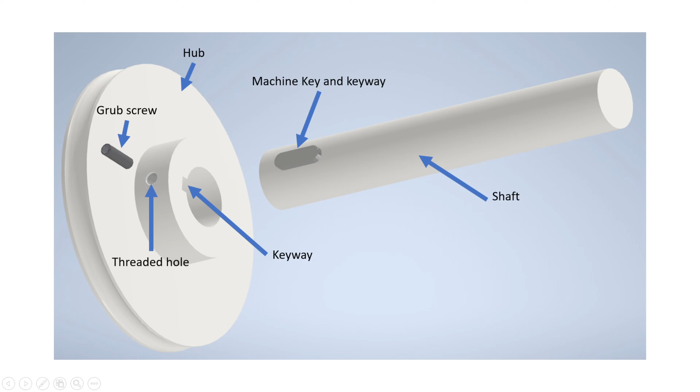The first option to make the keyway is to take an NC drill and drill one hole or two holes, and do the same with the carbide drill, and then plunge almost to the finished depth with an end mill, and then rough one time and then finish. This way you would have the same depth on the tool all the time, which means if you use it for another groove, it's going to wear out at the same depth every time, so you can always count on it.

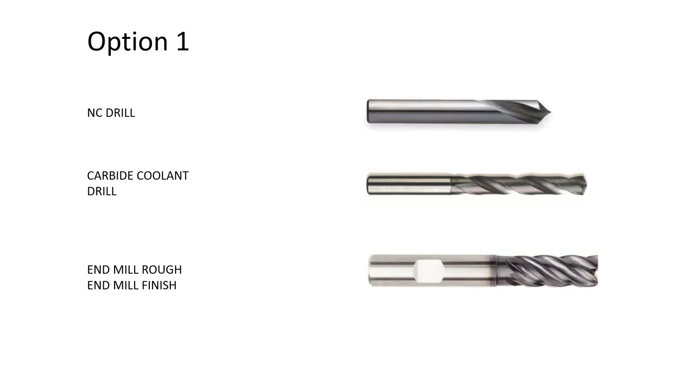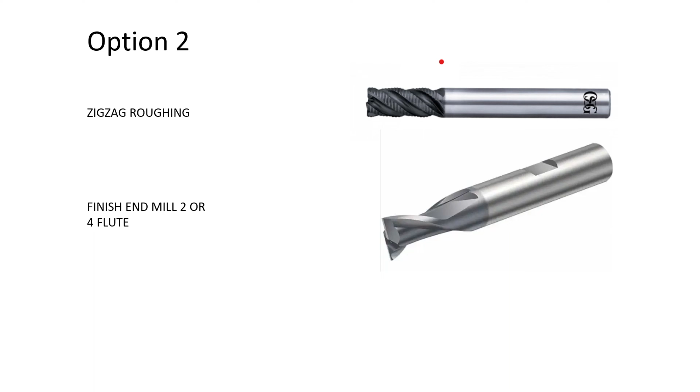The next option is zigzag roughing, where you zigzag all the way down to the roughing depth, and then you take a finish end mill, 2 or 4 flute, and finish it with 2 or 1 passes, depending on how you set up your diameter and setup of your machine.

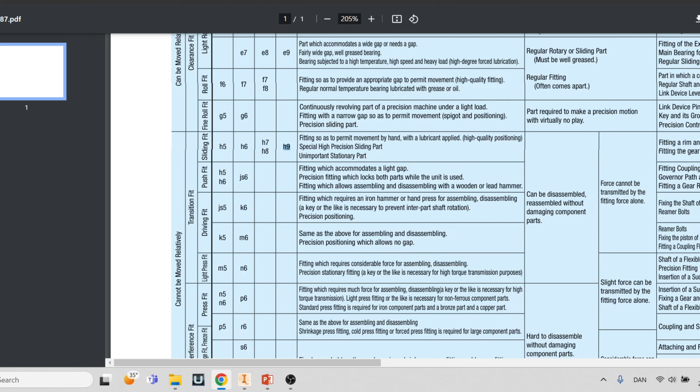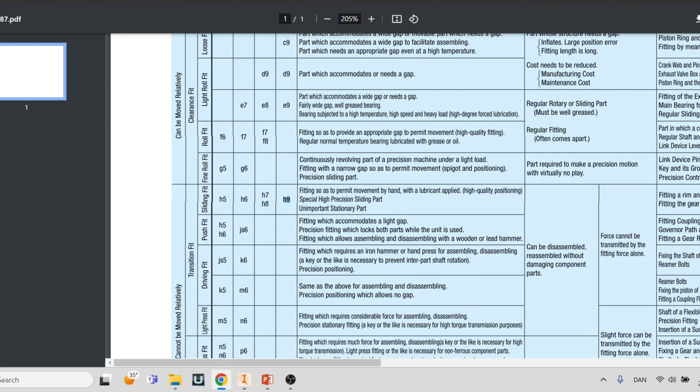Here I drew the parts of what could be an example. The machine key has different ways and tolerances for how they should be seated. If we go into technical data, we would see if you put on an H9, small h9, it's described as fitting so as to permit movement by hand with lubricant applied, high quality positioning, special high precision sliding part, unimportant stationary part.

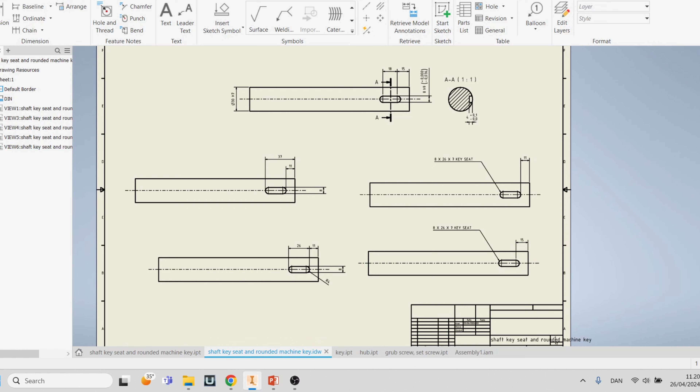Now I've made some examples in Inventor on how to put dimensions on the keyway and the shaft. The first one here is what I have seen most companies do, and this is also what's easiest, as many machinists have told me. Then there are other examples I have seen which also work, but they are more difficult to look at and not as neat and nice.

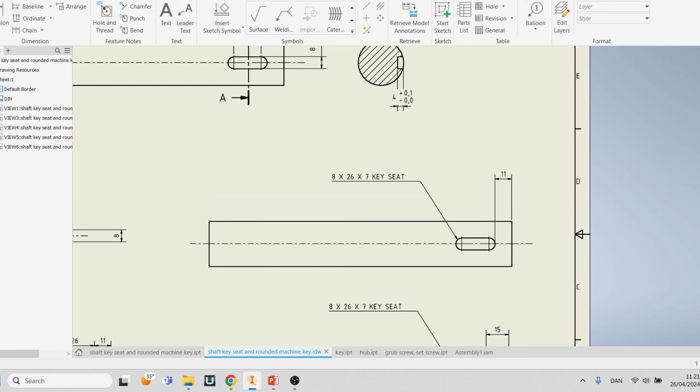Just take this one as an example. It says the width is 8, the total length is 26, the depth is 7, and the keyway starts at 11 from the end of the shaft. This one works fine, but it's very messy with all the text and XX. It is unnecessary stuff, and it's not as clear instructions to the machinist when he has to work on it.

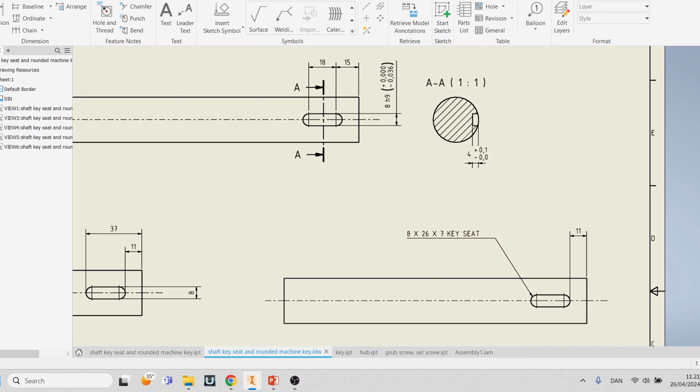This one though is very neatly made, and there are clear tolerances on what is allowed and not allowed. You see the width 8 with h9 fitting, and this other one has nothing, so the only way to understand the fitting of the key is either a standard tolerances description on the drawing, or the production already knows the machinist and the engineer who is drawing, and they would know what they want in that groove. It's a key, of course, so the machinist would fit it themselves.

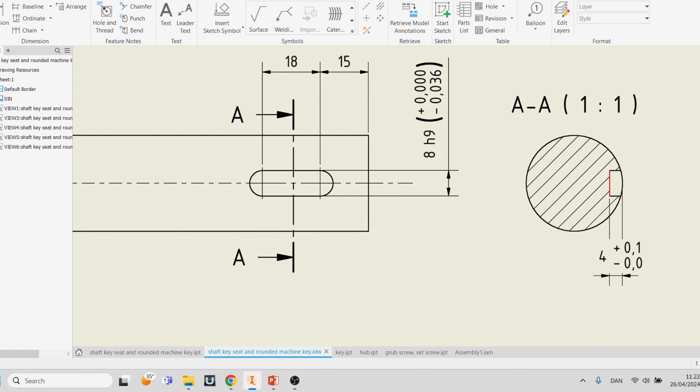But this one you can give to anybody and they would understand what is going on, because you have a tight tolerance on the width of the keyway, you also describe what is allowed in depth, and you have the section which makes it very easy to see that it's a keyway in a shaft. The dimensions start from the end of the shaft to the middle, not the start of the keyway, but the center of the radius on both of them.

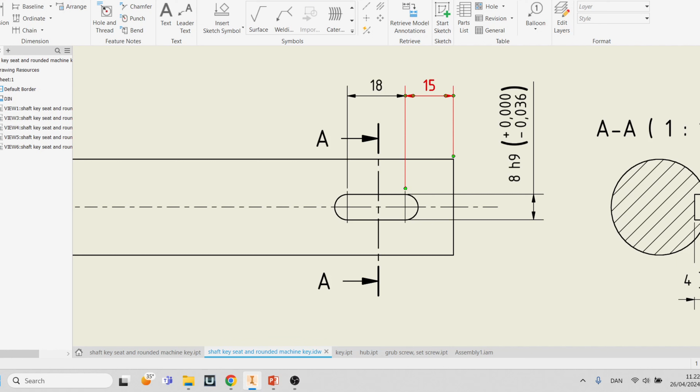When you do it like this, 15 from the end, you can subtract half the width. If the keyway is 8 millimeters wide, half of it is 4, so 15 minus 4 is 11, and you can put a slide caliper at the end of the shaft to the keyway and quickly know whether you are completely wrong or somewhat correct. And of course you can measure afterwards with a micrometer or a probe.

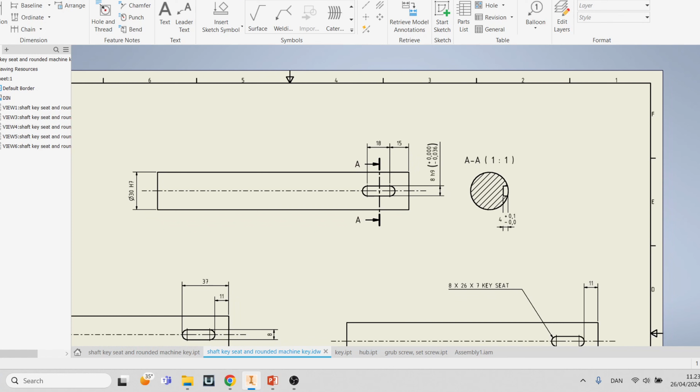This is just what I wanted to show people in the machine industry, that this kind of drawing is very neat and very nice. And look, if I'm a little bit more clever, I know how to move this.